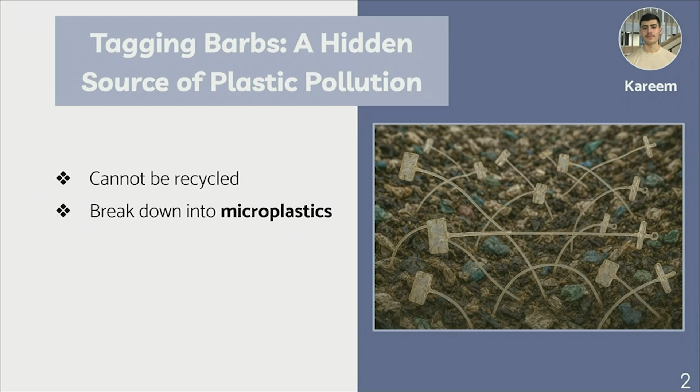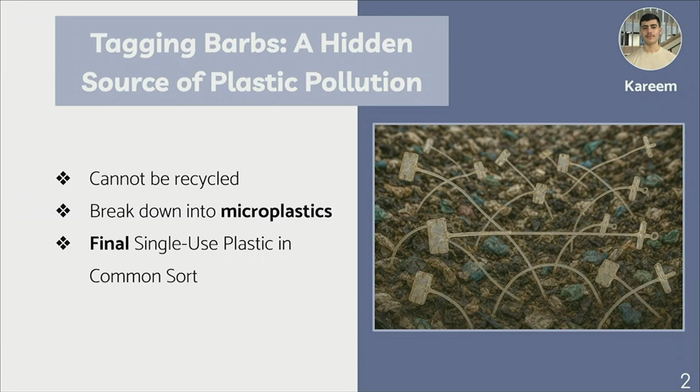First of all, they are too small to be recycled by Toronto's waste management system, which results in them being thrown straight into landfills where they break down into microplastics, polluting soil and waterways, and posing a risk to both wildlife and even humans. And here's the kicker: these plastic tagging barbs are actually the last source of single-use plastics in Common Sort. So by us eliminating them, we can make a huge difference.

Before moving on to our own design, we needed to establish a set of functions. First, tags need to be securely attached so they cannot be accidentally removed. And once they are removed, they should not be reattached. While maintaining the functions of the current barb, we set our clear objectives to make sure that our design stands out.

Our team has identified the two primary objectives: sustainability and time efficiency. For sustainability, our goal is to have less than 3 kg equivalent of CO2 per kilogram of material. And for time efficiency, we aim to create a design that ensures the entire tagging process is less than 30 seconds.

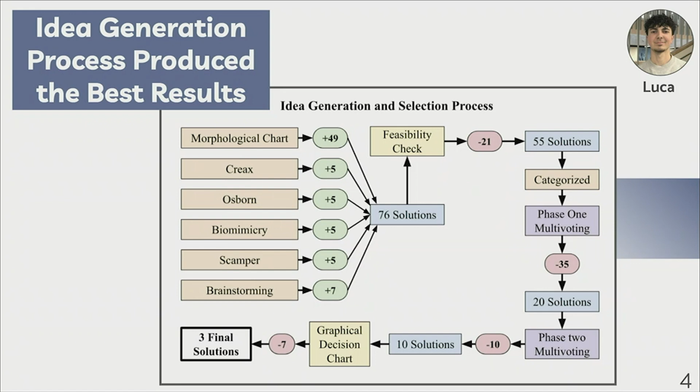For the idea selection and generation process, we thoroughly designed the design space. We generated a total of 76 solutions, which were then brought down to our final 3 through a feasibility check, multiple rounds of voting, and ranking in terms of our top 2 objectives, sustainability and time efficiency.

Our first solution is the Polyheat Tagger. The Polyheat Tagger is a benchtop device that uses a biodegradable polymer string. The 2 ends of the biodegradable polymer string are fused together using heating pads to create a secure loop around both the garment label and retail tag.

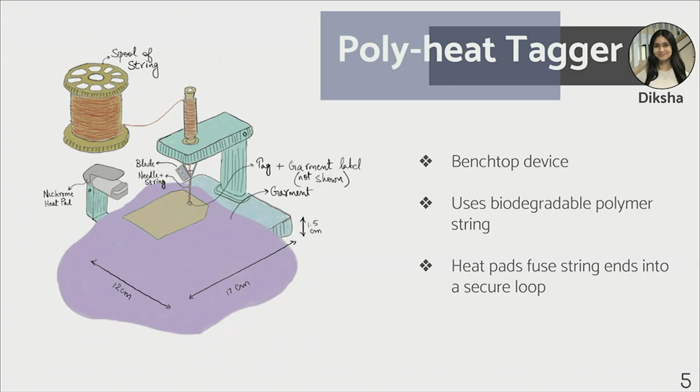Our second solution is the Thread Looping Gun. It is a handheld tool in which the operator slides the tag and the garment label's gap onto the needle, which has cotton thread running through it. The user would then squeeze the lever to pull the hook, for the hook to grab one end of the thread back into the tagger, and within the tagger, a knot-tying mechanism is used to safely tie the knot.

Our third design is the EcoLoop. It is a biodegradable zip tie made out of a synthetic polymer, polycaprolactone. It functions like a standard zip tie with a twist-tail feature that allows any excess material to be removed upon attachment. To narrow down these top 3 designs to the final one, we used a tool called a weighted decision matrix, which considers a plethora of factors relevant to our project.

Out of all of these factors, the most important is time efficiency, as in a retail store setting, the most valuable resource is the retail personnel's time. The Polyheat Tagger is the quickest to operate owing to its simple slide-and-tap mechanism.

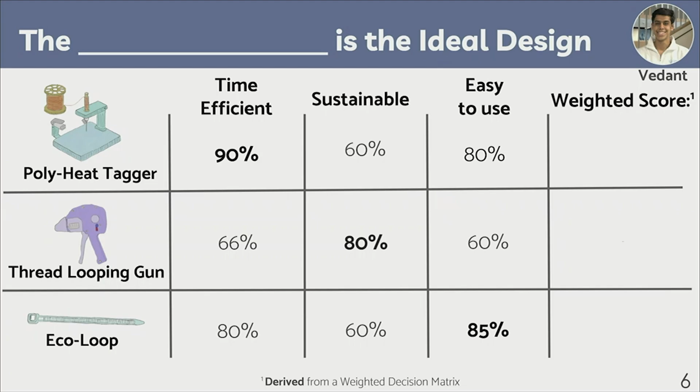As for sustainability, the Thread Looping Gun emerges as the winner because cotton yarn fibers decompose more easily compared to biodegradable plastics. When it comes to intuitiveness and ease of use, the EcoLoop is the clear winner as it requires 0 training time—at the end of the day, everyone knows how to use a zip tie, right? After careful consideration of all these factors, we arrived at the Polyheat Tagger having the highest weighted score.

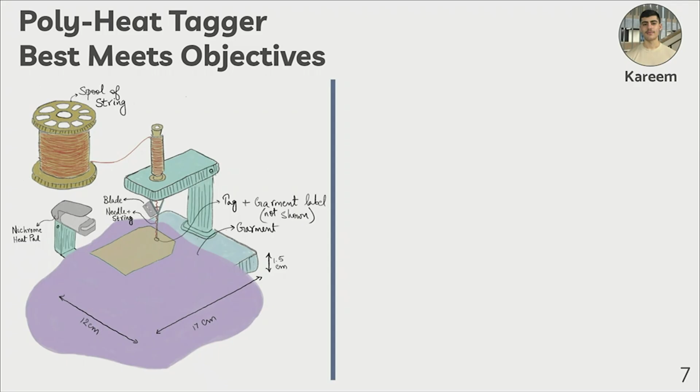Now on to our proposed design. So this is what we have: a benchtop device called the Polyheat Tagger. To reiterate, it works by feeding a biodegradable thread made out of polybutylene succinate, or PBS for short, through a blunt needle.

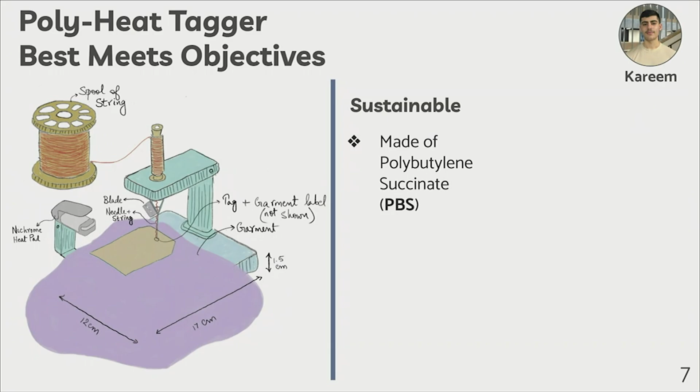Once the thread is looped through the price tag and the garment, its ends are fused together using a heat stamping pad. The result is a secure, closed loop, and it only takes 4 simple steps. Now, why PBS? Well, PBS is a biodegradable polymer with a high tensile strength of over 37 megapascals, which means it is strong enough for retail use while also being safe for the environment.

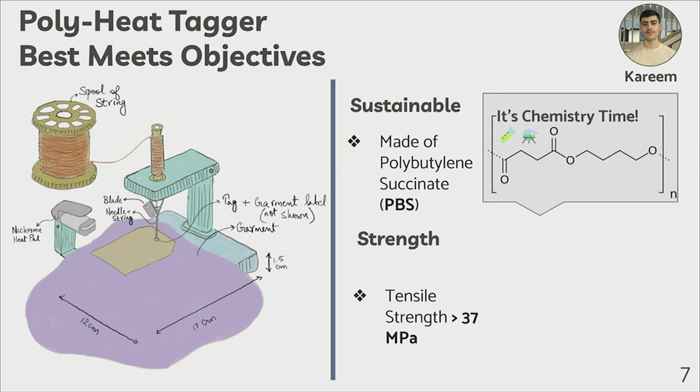But Kareem, wait, what makes PBS biodegradable? PBS contains an ester group, the RCOOR you see up there, that is naturally susceptible to degradation by enzymes and microorganisms. Thank you, Virant. So to continue, the polyheat tagger is also financially efficient, costing only $49 per 5,000 loops. So to summarize, this design perfectly balances sustainability, ease of use, cost, and durability, which are all very important objectives we identified early on in the design process.

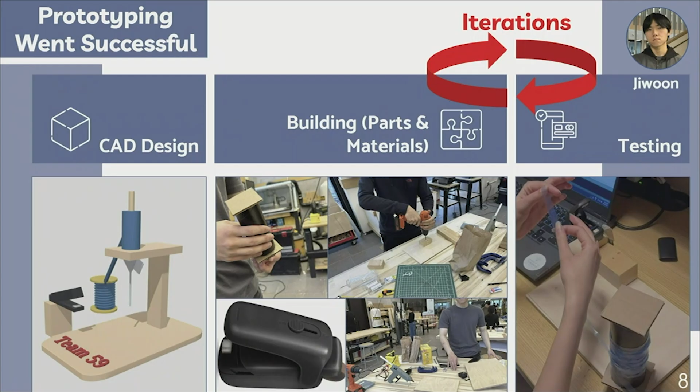The very last stage to prove that our design meets all the objectives is to make our prototype and to test it. Our prototyping started with the CAD design. In this stage, we identified which materials and which parts are going to be used in the prototype. After gathering all the parts, we actually built the prototype at Myhal Centre Fabrication Facility. Our prototype has several iterations between the building and testing stages to ensure that our prototype got closer to our ideal design. Now onto our prototype demo.

The first step to using the prototype is to take the garment label and the retail tag and thread it through the needle. After this, taking both ends of the string, you can form a secure loop, which you then place under the heat stamping pad for 3 or so seconds. During this process, the 2 ends are fusing together to create a secure loop, which you can then take off and then disconnect from the remaining spool using the blade attached. And that creates a retail tag attached to your garment.

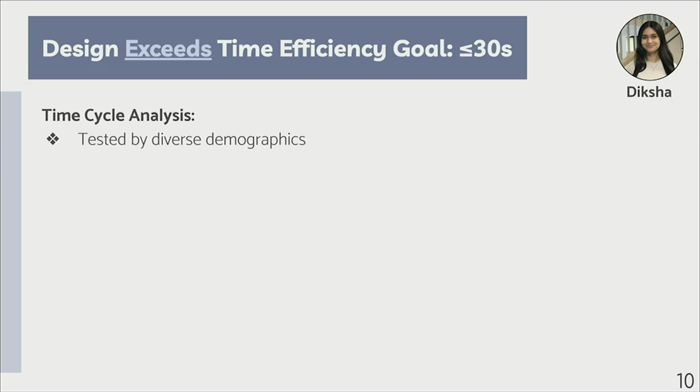Now, when it comes to measuring our top objective of time efficiency, we recruited 35 participants of varying demographics, such as age, gender, grip strength, and dexterity, to account for our design's inclusivity and DEI. First, we measured how long it takes one participant to attach one tag. Then, we coded VBA script to calculate the mean, median, mode, and standard deviation of these times. We applied these calculations to our primary gathered data, which we stored in a Google Sheets CSV file.

And in the end, we found that the average time of completion was 27 seconds, which exceeds our team's goal of 30 seconds. Overall, all participants were able to complete the task on their very first try with consistent times all across the board. And many even stated that our prototype and design was reliable and robust.

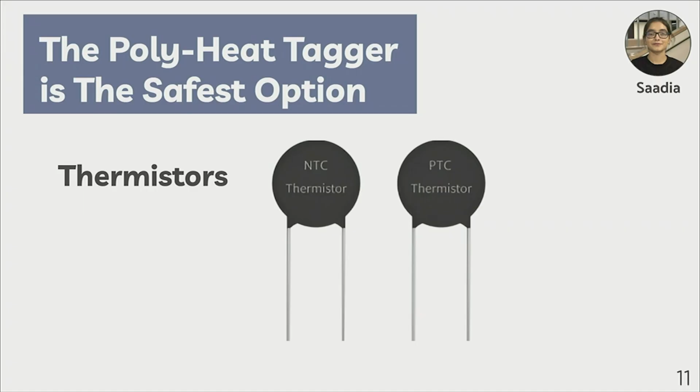In the future, we also plan to incorporate some additional safety features that would reduce the risk of injury to the retail personnel. The first one being a blunt needle. The blunt needle ensures that there is no accidental injury during operation. Second, guardrails around the nichrome heat pad. These prevent the operators from accidentally touching the heat pad and thus prevent any chance of burns. Third, thermistors. The thermistors ensure that the heat pad operates within safe temperature limits, thus preventing any overheating or fire hazards.

With the help of TABIA, the Toronto Association of Business Improvement Area, they can help to aid the rollout of our design to all retail stores in the GTA. Also, as new and more sustainable materials emerge, they can be incorporated into our design, ensuring long-term environmental adaptability. As for the threats, there is a chance that stakeholders such as the Toronto Environmental Alliance might question the environmental validity of the design.

To conclude, the next steps are, number 1, UAT, or user acceptance testing. During this phase, we deploy our current prototype at the common sort annex location and gather operator feedback over the span of 2 weeks. With this feedback, we move on to step 2, that's reprototyping. During this phase, we really focus on user experience, how the product and operator interact with each other. We also take this opportunity to include DFX considerations such as safety, cost, and reliability.